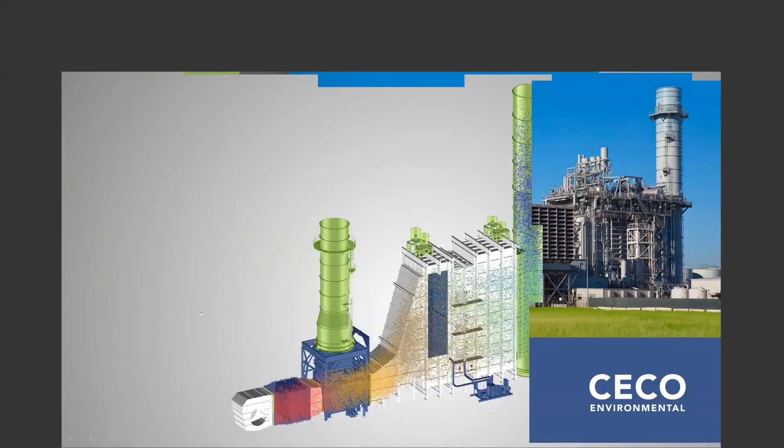As Scott mentioned, we have some advancements in the world of SCR that we are eager to present to you today. And in the next couple slides, we'll go through that, and hopefully you're able to walk away with some enlightening information. So we always like to start with a slide that shows the overall system here. So, this probably looks relatively familiar to a lot of you. Looks a little bit like your units potentially that you're operating today.

Although we're going to be going through some specific applications and features of an SCR system, it's always good to remember that even those specific parts are part of a larger system, and the goal of the larger system is to operate efficiently and safely. So although we may be talking specifically about an AIG, there are other systems upstream and downstream of that AIG that can affect the overall performance. Go to the next slide.

And to be more specific about the technologies we're going to be addressing today and how they can be applied for emissions control, we're going to be touching on what we refer to as the RASCR. That's a next generation technology that we'll go into detail about and go over some of the benefits and features of it and how it may help your plant operate more efficiently.

We're going to go into what some reagent options are to control your SCR, urea being one of those. It may not be the most popular choice at the moment, or may not be the most typical reagent in a system, but we've seen an industry trend towards urea as it does offer a safe alternative to ammonia.

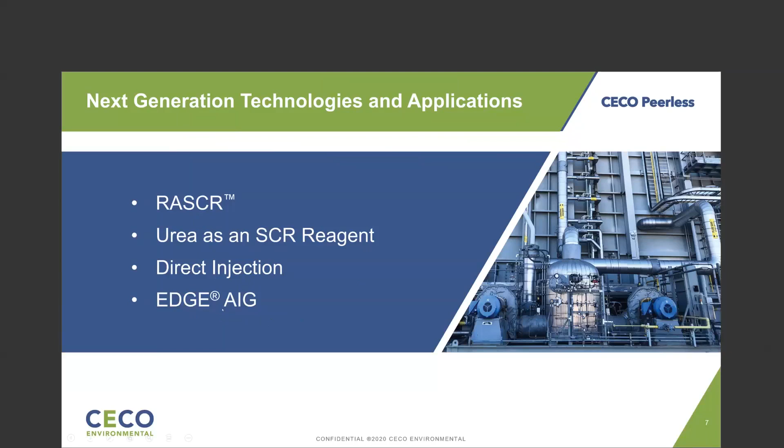Direct injection is another technology we're going to hit on. We'll go into the details of how that technology can be applied, what some of the benefits are of it, and what some feasibility aspects are that we need to take a look into before trying to apply it. And as well as the Edge AIG that we have applied on many units and seen some terrific results in terms of SCR efficiency.

Just a graphical representation of two of those technologies that we're going to go into detail about here. Again, the RASCR technology, which is on the ammonia vaporization side of the SCR, as well as the Edge AIG, that, as you can see, is the ammonia injection grid located upstream of the catalyst. We'll go into the details about both of those technologies, the benefits of them, and some analysis of how they can perform and improve your overall system.

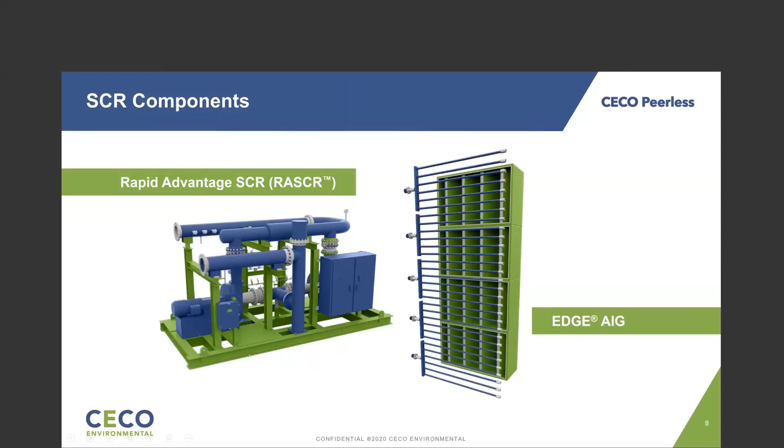So with that, we'll get right into it. We'll get into the specifics, and we'll start off with the RASCR technology, and Vaughn Watson, our subject matter expert on RASCR technology, will take it from there. Yeah, thanks, Jeff. Our RASCR technology, or Rapid Advantage SCR, is one thing that we're going to be showcasing today.

Many gas turbine plants today are operating to augment renewable power resources, such as wind or solar. These require plants to start up very quickly and achieve a peak power demand rate and vary the gas turbine load frequently to combat the variable nature of backing up a renewable resource. As we're reliant on the weather aspects of the wind blowing, the sun rising and setting with variability throughout the day, gas turbine flexibility and fast responsiveness to the changing demands is a utmost requirement.

This can take its toll, unfortunately, on the exhaust system emissions controls and may require changes to the system to achieve the compliance during these operating conditions. If you could click for me.

Many regulators are beginning to restrict the ability to operate outside of an emissions threshold during maintenance, startup, and shutdown, or MSS events. In addition, some permits are on a tons per year limit, therefore reducing the amount of NOx overall during the startup helps add additional run hours and starts to a plant's capabilities. It's about reducing the area under the curve. Could you click again for me?

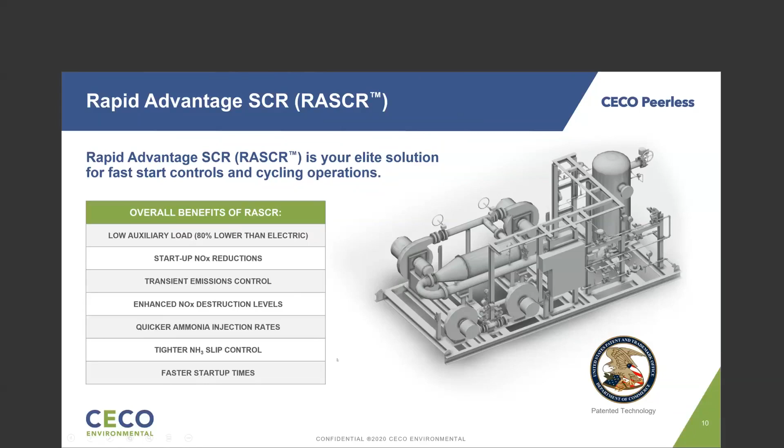Thank you. The challenge becomes a bit twofold. It's a race between the exhaust temperature versus time curve and the catalyst reactivity versus temperature curve. The exhaust temperature is ramping up while the catalyst efficiency is increasing. At the same time, the ammonia must have adequate temperature to be vaporized. We wish to begin ammonia injection sooner in the process so that we can begin reducing NOx in as short an amount of time after startup as possible.

The ammonia injection rates during the startup period are nearly double or higher than steady state operation. So not only do we need the heat input immediately to vaporize, we sometimes need twice as much heat during the startup period to vaporize the larger quantity of ammonia during the startup cycle.

The key there is to be able to vaporize the large quantity of ammonia rapidly and accurately deliver it to the catalyst as the catalyst is moving up in its efficiency curve without exceeding ammonia slip limits. Using our RASCR technologies, we can very, very quickly vaporize the ammonia and begin ammonia injection as little as minutes after startup. You could click for me.

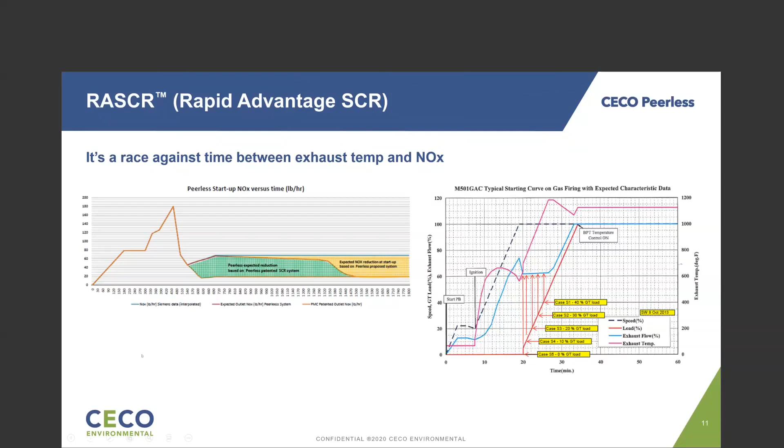On systems that rely on electric heaters, the additional electric kilowatts required to quickly vaporize the quantity of ammonia needed at startup becomes extremely large and begins to be cost prohibitive very rapidly. On the other hand, systems that rely on hot gas recirculation fans, the challenge is the gas drawn off of the HRSG is not at enough temperature during a startup to adequately vaporize the ammonia.

We have successfully hybrided electric and hot exhaust systems together. However, the RASCR system that we've developed recently has become the number one choice for these fast start systems. Peerless has this proprietary equipment designed to achieve emissions compliance during these startup and transient conditions. This equipment is a suite of solutions aimed at fast start and transient load operations on combined cycle gas turbine plants. And again, it allows us to rapidly vaporize ammonia while controlling NOx and slip during shifts in load.

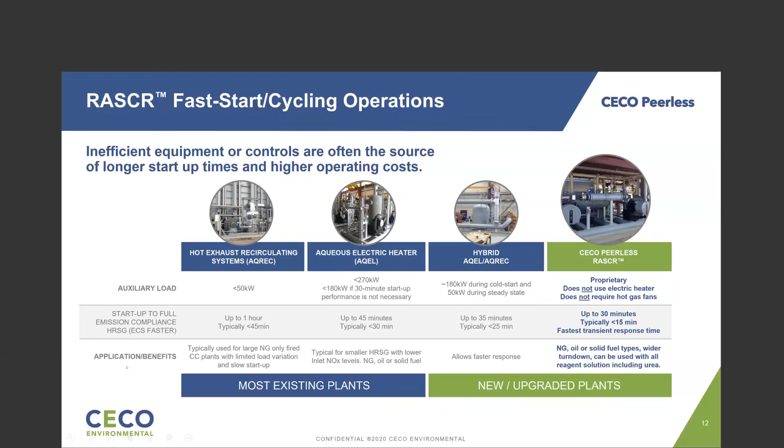In addition to the startup and transient operational advantages, a major advantage to this technology is it is extremely economical to operate. When compared to the large parasitic load of electric vaporization or some of the higher maintenance costs of a hot gas recirculation system, the RASCR technologies offer a substantial operating expense savings, in many cases offering a return of investment of as little as a year or more.

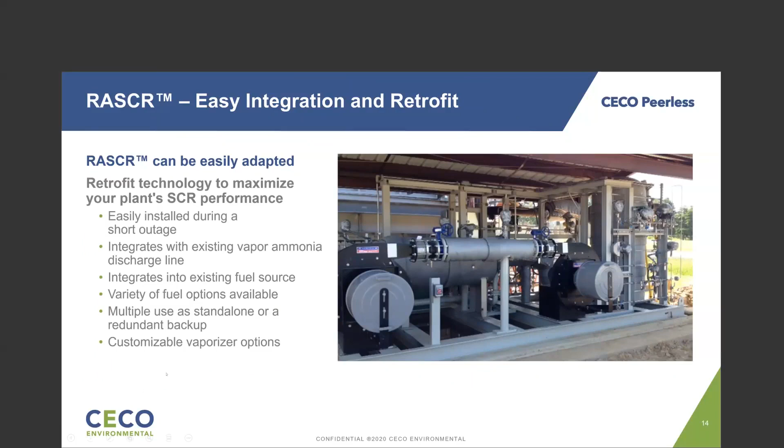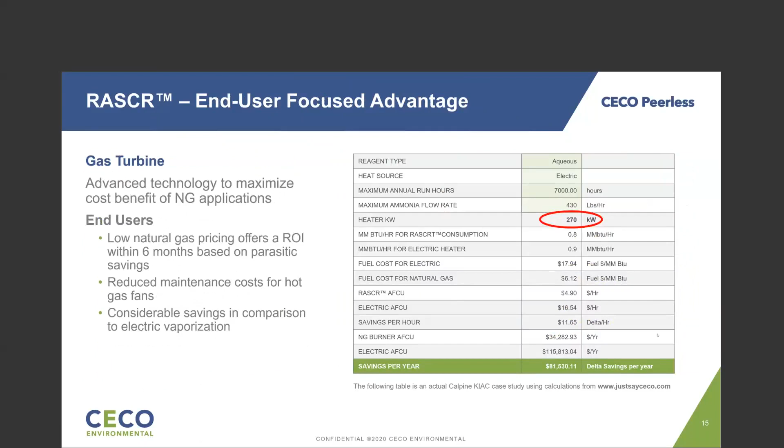And with that, I'm going to hand it back over to Jeff to talk about our next topic. Thanks, Vaughn. Yeah, Scott, if we could go into the next slide, that was a good overview on RASCR technologies. If anyone has any questions on that, feel free to put it in the chat and we can address those at the end of the presentation.

So it was a good segue discussing some options on how you can vaporize ammonia and introduce it into your SCR system. What we want to focus on now is some of the different options we have as a reagent. We will get into the specifics of urea, but let's first cover some of the more traditional options we have.

So in an SCR system, really the function of the storage and handling system is to store the reagent that we're going to use to generate ammonia gas in front of the catalyst. So there's some very straightforward ways to doing that, and some that require a little bit more equipment, engineering design. A lot of the decision-making factors in which reagent to use are based on the cost benefit versus the risk. And that risk typically comes in the form of safety and the safety requirements required to store ammonia at your site.

A very common reagent to use on an SCR system is anhydrous ammonia, especially larger units. The advantage here of anhydrous ammonia is you don't have the liquid mixed into it. It's straightforward. You pull off the tank as a gas, you introduce that into a dilution air system, and you deliver that to the AIG in front of the SCR catalyst. It's a very straightforward way of effectively reducing NOx.

Usually that is stored as nearly 100% ammonia gas in a pressurized steel vessel. So the tanks are often large steel pressure vessels kept under pressure, and you pull off the gas from that tank and introduce it to your system. Obviously ammonia has safety concerns with it, especially when it's pure ammonia gas. If there were to be a leak in that tank or in the piping or in the delivery system, it could be a major health hazard to the personnel of the plant. It only takes a few hundred ppm of that raw ammonia to be fatal to the people exposed to it.

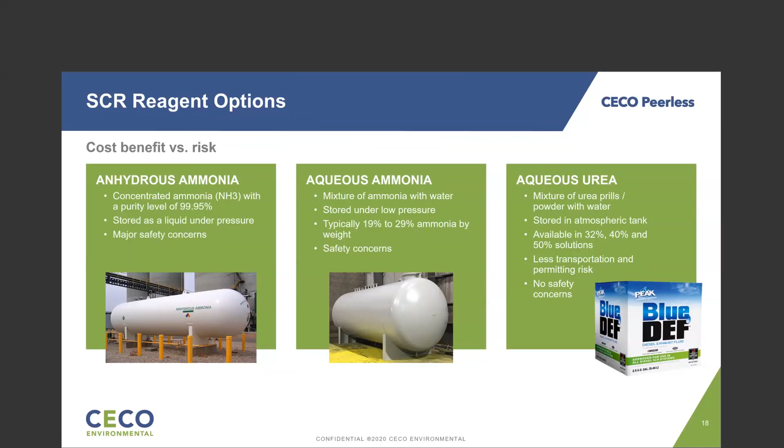It comes in different solutions. 32%, as I said, is the diesel emissions fluid, DEF, concentration, but it also comes in 40% and 50%, regularly available in many regions. That allows you to sometimes store less water, obviously, and more solution. Clearly, because it's a non-hazardous liquid, there's less transportation and permitting risks and very little safety concerns for the plant personnel.

Getting into a little bit more detail on the urea, now that we've talked about the differences between them. There are some challenges with urea. It's not the same as an aqueous ammonia system. There are different challenges and considerations that need to be taken into consideration during the design of a system using urea. Urea is very corrosive as a liquid. For that reason, it's not going to be stored in a carbon steel tank. It'll eat right through it.

So the storage tanks are typically either stainless steel, which can be expensive, or there are less costly options, usually FRP, or fiberglass reinforced plastic. Those tanks come in a variety of sizes. They even come in double wall tanks, and we'll get into that a little bit. All the piping, anything in the wetted parts, needs to be stainless steel, and you need to take a close look at the seals. Viton is a good seal for this type of solution.

Another challenge with urea is the temperature limitations. Depending on the concentration, it has different freezing temperatures, but you do want to avoid having the urea salt out or crystallize in your system. It could cause some major headaches in the fluid delivery system. So a lot of plants we'll see need to heat trace and insulate their lines in order to use a urea-based system. Obviously, you're going to take into consideration how much capacity.

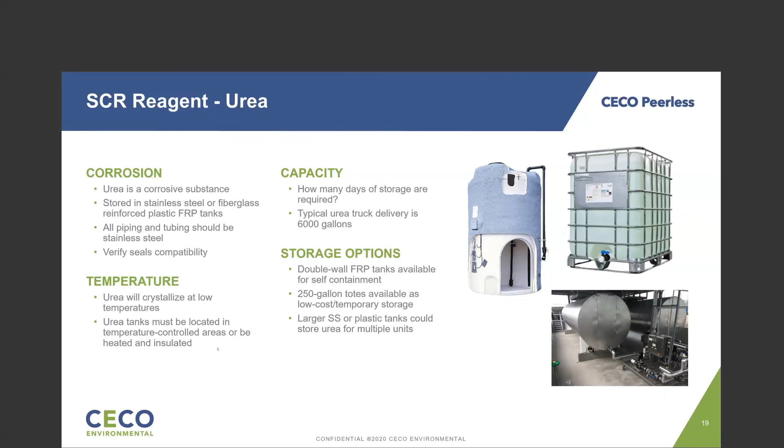So something we've seen in the industry is reagent conversions of existing systems. There are existing anhydrous ammonia systems that, due to safety concerns or more availability of aqueous ammonia, are switching to aqueous ammonia or potentially even aqueous urea, or aqueous ammonia systems converting over to aqueous urea systems. It may not be as expensive as you might think. Depending on what system you're going from and to, some parts may be able to be reused.

For instance, an anhydrous ammonia tank may be able to be repurposed as an aqueous ammonia tank. Obviously, with an anhydrous ammonia system, you're not going to have the vaporizer, so the addition of a vaporizer would be needed. The addition of the fluid handling system would be needed. So if that's a consideration in any of your facilities, those are things to take into account: space availability and power consumption of these new pieces of equipment.

If you're going over to a urea system from an aqueous ammonia system, it's unlikely that the tank is going to be compatible unless you have a stainless steel tank there already. So a new tank may be needed. It's possible a fluid handling system could be needed. The difference between the amount of ammonia injected and amount of urea injected typically isn't so great that it's out of the range of the fluid handling system, but you obviously need to take a close look at that.

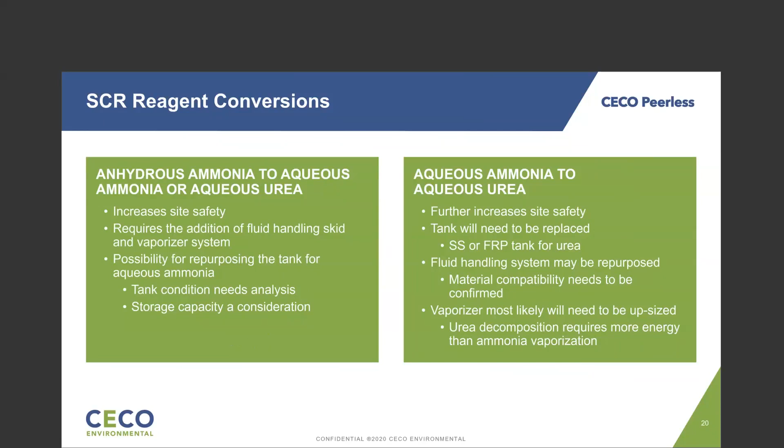So our first poll question of the day. What type of reagent are you using at your facility today? If you have an SCR system that you're operating, if you could tell us what type of reagent you're using: anhydrous ammonia, aqueous ammonia, aqueous urea. Lots of votes for aqueous ammonia. To be expected, I think.

All right, thank you for the feedback on the poll. Appreciate that. So another technology we want to get into that, for combined cycle units, certainly wouldn't be the typical solution. Typically what you're seeing, like we've been talking about, is an aqueous ammonia system with a vaporizer, whether that's hot gas fans or electric heaters, producing the hot gas needed to vaporize that ammonia and sending it through some interconnecting piping to the ammonia injection grid, introducing that ammonia gas in front of the catalyst. A very efficient, typical way of reducing NOx in a combined cycle plant.

We can advance one slide. There are other options for that, though. Something we refer to as direct injection. So direct injection SCR is a method of supplying ammonia vapor, ammonia gas, to the SCR system gas path without the need for a vaporizer or the AIG. So what it's doing is it's using the heat energy from the main exhaust gas to vaporize the liquid, whether that's ammonia or urea, and turn it into an ammonia gas upstream of the catalyst.

Now, on these types of units, there are many feasibility considerations that need to be taken into place before deciding whether this is a good option for your unit. One thing: is there a duct burner in the gas path? If you're injecting an ammonia solution and it passes over the heat of a duct burner, much of that ammonia is going to go to NOx. It's going to burn up the ammonia, it's going to go to NOx, and you actually end up increasing your NOx potentially. So if there is a duct burner in the gas path and the only way to inject is upstream of that and the catalyst is downstream of that, there would certainly be some challenges with implementing a direct injection system.

Again, the typical SCR system with the vaporizer leading to an AIG, the major advantage of the AIG is you can get very good distribution of ammonia across the catalyst face. That's the greatest challenge in direct injection. Oftentimes able to be overcome, not every time. So what is the cross section of the duct in which you may be injecting that liquid ammonia or liquid urea? Is it feasible to get enough coverage of that ammonia to then mix out with the exhaust gas prior to the catalyst? How much residence time is there between the point of injection and the face of the catalyst? If it's a small duct at very high velocity, there may not be enough time for the reaction to happen or to evenly distribute.

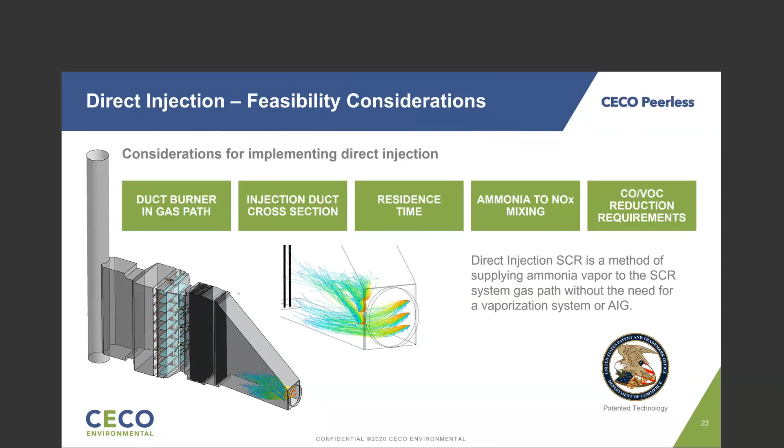So if we're injecting the liquid directly into the gas path, we're bypassing the need for some separate equipment, right? We don't need that separate skid that has the dilution air blowers and heaters or the hot gas fans. We have less equipment there. So there's obviously a cost savings with the types of systems that can be direct injection method.

The AIG doesn't need to be there. So a lot of the valving, the AIG piping, and the grid itself does not need to be there. So there's clearly some reduced capital costs there. Without the need to operate those blowers and heaters, without them even needing to be on site, obviously there's some operational savings there. You don't have the hundreds of kilowatts needed to vaporize the liquid into a gas.

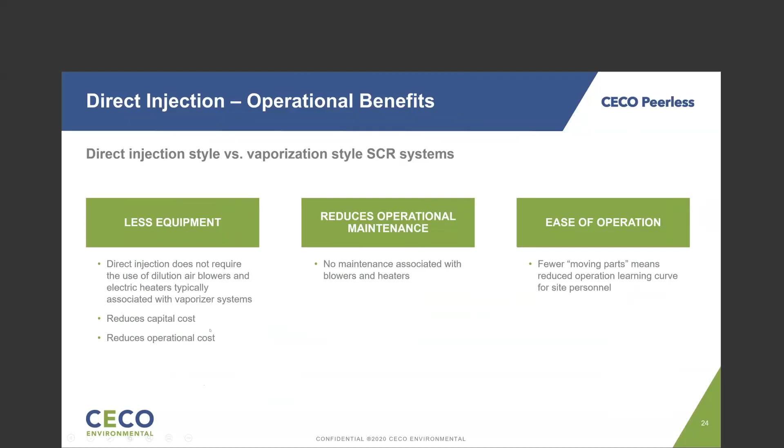You're using that heat energy just from the exhaust gas, the main exhaust gas, as your medium to vaporize the solution. And again, ease of operation, fewer moving parts, easier it is for the plant personnel to operate. There are other challenges that could be a little less familiar. So graphically, here's how a system could look.

So those injectors obviously need to be design engineered for whatever the application is in terms of flow rates, temperatures, pressures, and all that. Definitely need to take in consideration where those injectors are located, how they interface with your piping. Obviously, as we mentioned, let's say if this was a urea direct injection system, you don't want that liquid urea coming in contact with that carbon steel duct. So you're going to want to make sure the system is designed as such to not cause any other damage.

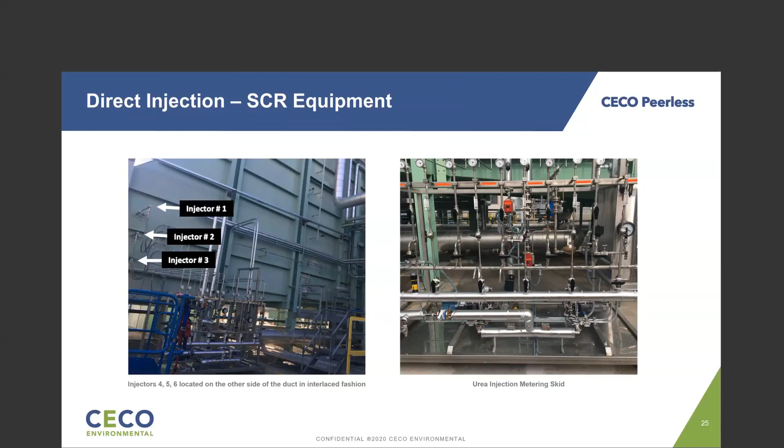There was a lot of headaches that this particular facility had with their system in terms of maintaining it, doing a lot of replacement parts, a lot of damper changeouts, a lot of catalyst cleanings, things of that nature. So they were very motivated to retrofit a more user-friendly system onto their units. So the solution that we implemented was actually a urea-based system, direct injection system.

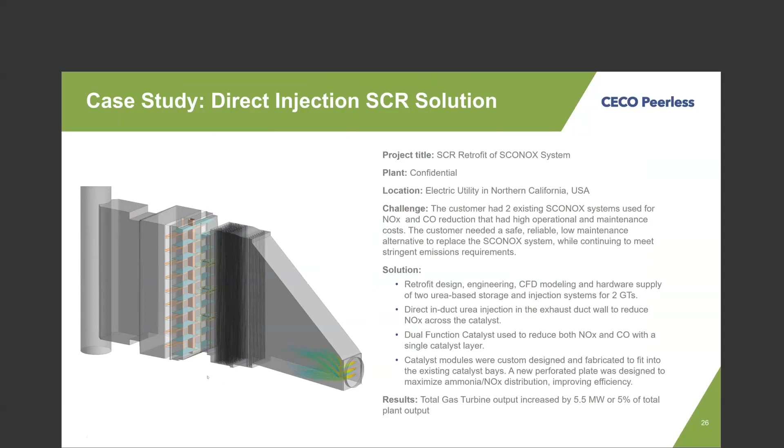In this particular case, the pressure drops were dropped greatly across the unit. The ancillary equipment associated with the old system was removed, and we were able to increase their power output by quite a bit, giving them a pretty good ROI on this system. A little bit more data on the next slide. Just showing some of the numbers there, 50 to 100% load range data. You can see some of the very low NOx numbers under 2 ppm, 94% reduction in one case there. And again, the very low CO numbers, and even the ammonia slip numbers were quite low.

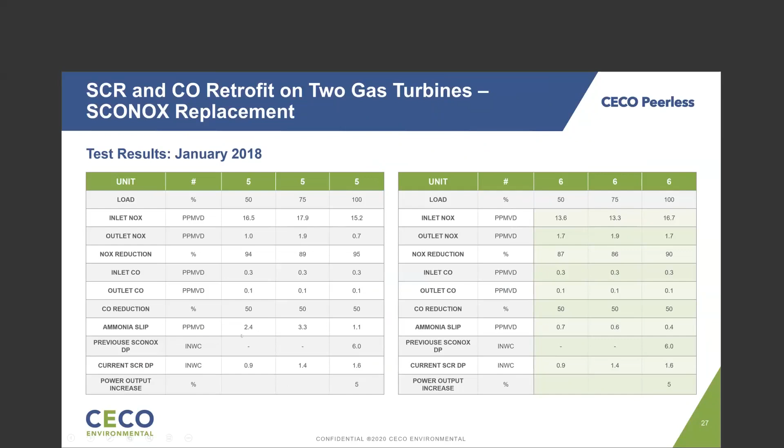So, a very, very highly efficient emissions control system here as a retrofit direct injection application. So that's just an example of how it can be done, and a little bit of data, a little bit of graphic there on how that's carved out in a retrofit application.

Looks like the large majority have a duct burner upstream of their SCR. Yep. All right. Not too surprising there. So those could be a challenge for this type of technology.

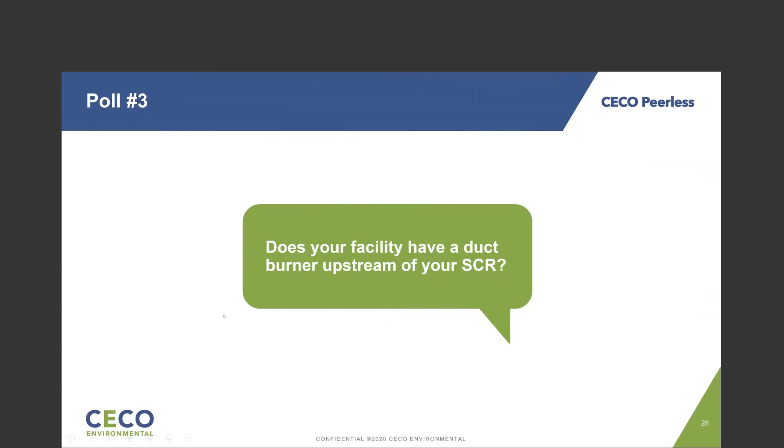With that, Vaughn's going to go into the details of the Edge AIG system as our final piece of advanced technology. Yeah, thanks, Jeff. As Jeff kind of alluded to earlier, one of the things that's most critical to these high-performance SCR systems is the ammonia to NOx distribution. And one of the biggest improvements to an existing SCR system would be improving that ammonia to NOx distribution by improving the ammonia injection grid design.

So the ammonia to NOx distribution plays such a critical role in the overall SCR performance. When we talk about meeting permit level emissions, if your AIG is, say, plugged or has degraded, or you are facing design challenges in achieving current day emissions concerns, one of the things that we would look at is the ammonia to NOx distribution.

When we are looking at a new SCR catalyst, a couple of the key factors there are what's the velocity distribution, what is the temperature distribution, but the most important one that we've seen is the ammonia to NOx distribution. And by improving that or getting it closer to sub 10% RMS, we've seen a major increase in the overall SCR performance.

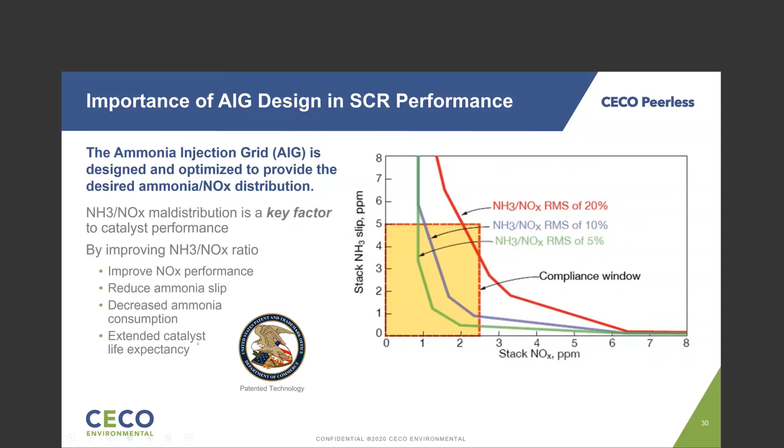By improving this ratio, we're improving the NOx performance, reducing the ammonia slip that plants are seeing. We are decreasing the ammonia consumption that plants are using, and in many cases, extending the catalyst effective life by utilizing some of the margin that they have left in their existing catalyst. If you could go to the next slide for me.

So Peerless's patented Edge AIG design, which has been Peerless's standard since about 2007, has kind of changed what common ammonia to NOx ratios we see out there in the SCR market. A lot of times back in the early 2000s, 15% RMS ammonia to NOx was very common. However, with latest gas turbine technology and latest air permit requirements, that's simply not good enough to achieve, say, 2 parts per million NOx, 2 to 5 parts per million slip, greater than 95% DeNOx efficiency.

So by improving that ammonia to NOx distribution number, we've seen a number of plants be able to achieve modern day technology on catalyst that's 10 to 12 years old without having to replace that. One of the things that's also a great side effect, so to speak, is that the cross-sectional area of our new AIG lances is inherently less susceptible to plugging. So that in turn means less maintenance costs and less outage work that needs to be done to clear plugged AIG holes. So this gives us a distinct advantage.

Again, it's been our standard issue technology for over about 10 years now, and we've been retrofitting a lot of plants with this design to allow them to achieve current operating conditions.

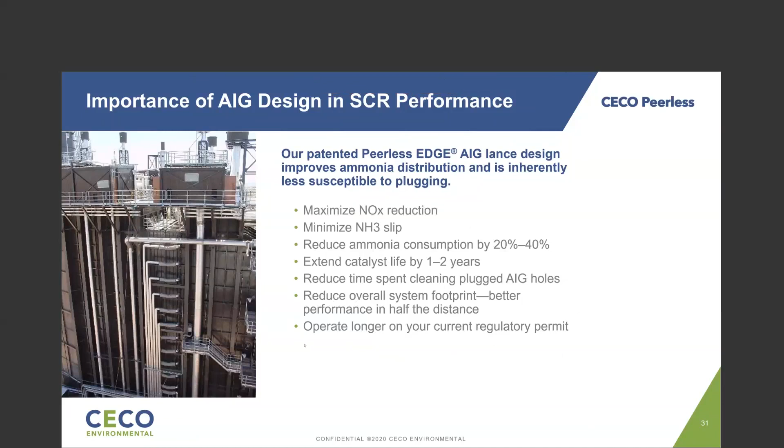How this works is on conventional AIG designs that were probably prevalent in the late 90s, early 2000s, which was a circular lance with holes at 12 and 6 o'clock. Those designs relied on low velocity wisps of ammonia that required quite a bit of residence time and mixing distance to achieve the distribution that it was able to prior to the face of the catalyst.

In today's Peerless Edge AIG design, we're allowing turbulent mixing to take place over the cross section of our lance by the wake that is forming on the backside of our lance, as well as, instead of low velocity wisps of ammonia being injected, we are now dealing with jet penetration. So we are increasing the pressure within the lance.

We are effectively getting further into the exhaust stream with that mixing and putting our ammonia plumes right in the line of our wake that's created with our AIG design. And that has seen major improvements in ammonia to NOx efficiency, as well as the distribution across the entire cross section of the duct.

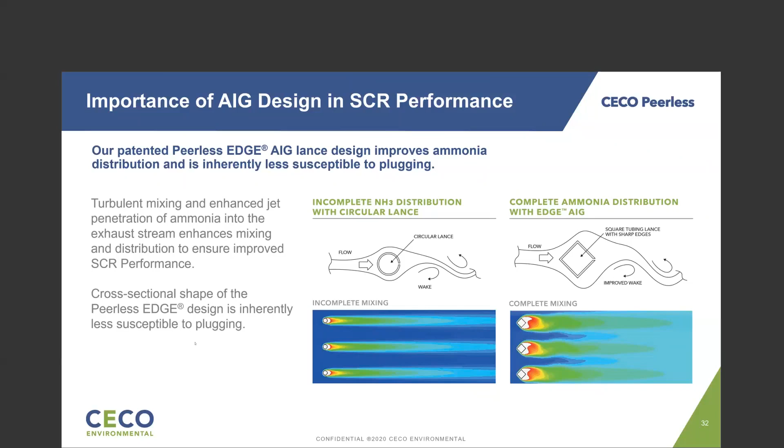So this design not only has been proven, but it's also become a really big game changer for us on a retrofit basis to allow older plants to meet newer technological requirements.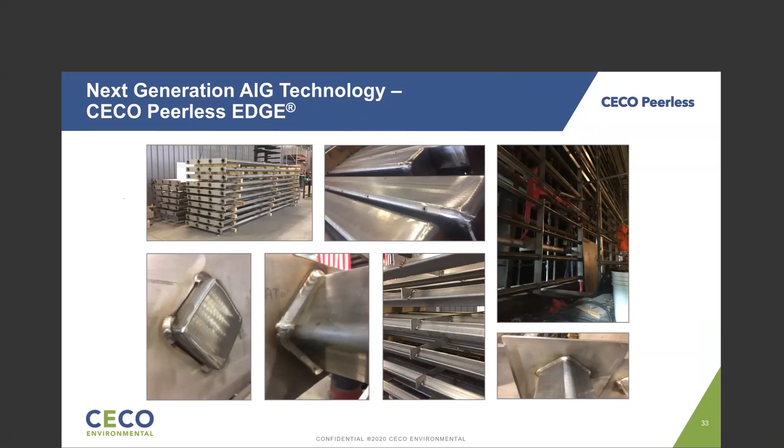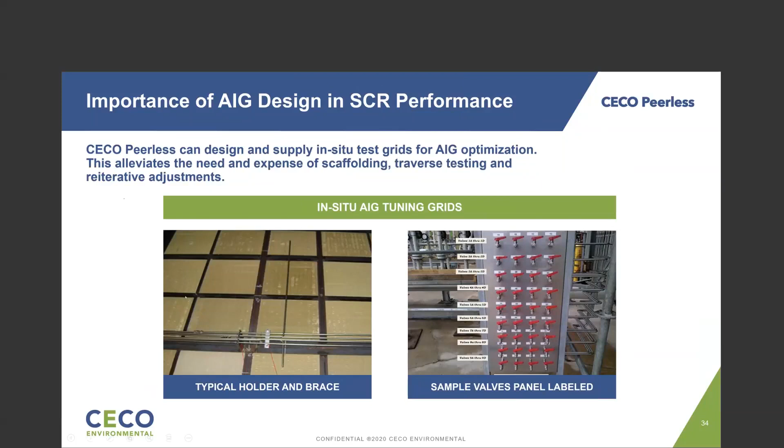One of the ways we can verify our claims is by going in and tuning ammonia injection grids, but also going in and sampling the exhaust gas to measure the ammonia to NOx upstream and downstream of the catalyst in order to show that by improving the ammonia to NOx RMS values we're able to improve the SCR performance as a whole. In addition, we're able to take our better technology and tune it to meet the utmost performance it's capable of right after installation and during a quick outage.

A big issue we experience in the field is AIG plugging. Usually it's ammonia byproducts that are carried over or actual degradation of the metal, like rust, being impinged on the orifices of the AIG. Mill scale and rust can break free over time. Some of these plants are 20 years old, and rust deposits are steadily making their way into the holes of the ammonia injection grid.

With the Edge AIG design, the rust and any other debris that's in there has a spot to accumulate without plugging up the holes. One of the big issues with plugging is that as soon as it plugs, you can't predict the ammonia to NOx shift in distribution. The ammonia to NOx ratio shifts as the AIG gets plugged or fouled. Having a design that not only improves the ammonia to NOx ratio but also inherently combats that makes for a really great product.

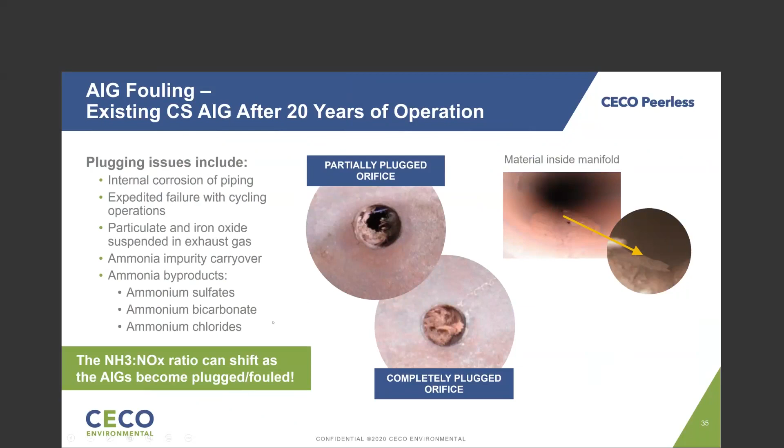A quick case study. This is a plant in the southeast United States. They had 9 HRSGs. We had worked with them because they had noticed some AIG fractures and some other issues. Peerless had gone in and done 1 unit of Edge AIG upgrade. At the conclusion of that, they went ahead and did the other 8. We had seen their ammonia consumption go from about 600 to 700 pounds an hour down to about 300 or 400 pounds an hour, depending on load. And the plant was extremely pleased.

After doing some tuning and some catalyst sampling, they were able to estimate an extension in catalyst usable life of about 2 years. So not only did this reduce their chemical usage, improve their NOx control, and improve their ammonia slip, but they were also able to stave off a capital catalyst expenditure for up to 2 years before putting that back in their maintenance budget. So this was a huge win for Peerless and for the end user. And that was 9 units of Edge retrofit that we've done.

I did mention earlier that this has been our standard design since about 2007. In Peerless's history since 1988 of doing SCR systems, we've done 1,032 SCR systems worldwide, of which about 42% are of the Edge AIG design since about 2007, as well as the retrofit units we've done. So this is a proven technology. It's an easy retrofit that can be done in a short outage, and a lot of things we do don't disturb adjacent equipment, such as external manifold piping and so forth.

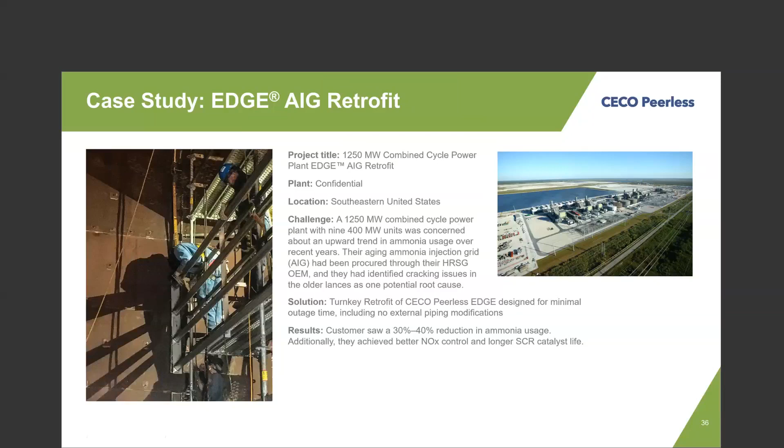So to recap real quick before the Q&A section, the next generation emissions technologies can increase plant efficiency and performance. We've seen the reduction of parasitic load for ammonia vaporization by 80% or more using the RACER technology, and reduced ammonia consumption by up to 40% using our Edge AIG design. A combination of these technologies, whether it be direct injection or RACER, has seen DeNOx of greater than 96%, CO destruction greater than 98%, and VOC destruction between 40 and 50%. And this is what the industry is trending towards for emissions from 2020 and beyond.

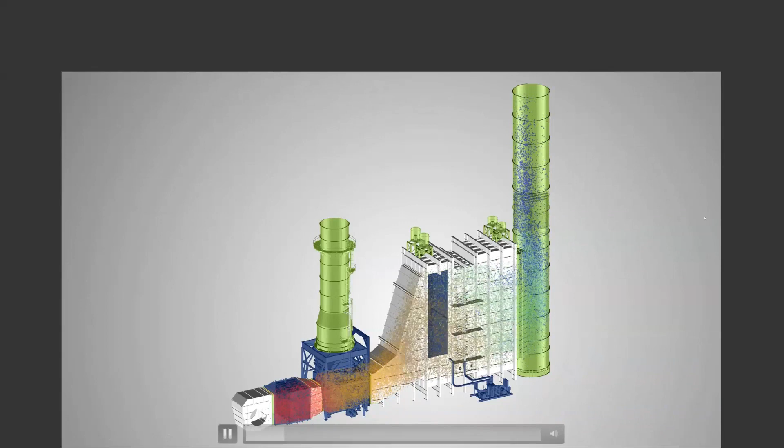Okay, how difficult is it to retrofit a current AIG to add the Edge system? We are doing several in this upcoming fall outage, most of which are an 8-day outage. In many cases, we are simply scaffolding downstream of the AIG. We are cutting off the existing round AIGs in many cases at the wall, and then fitting our edge lances to the stubs that stick through the wall. There are a few distinct cases where that's not feasible, but most oftentimes we see 8 to 10 day outages, and we can do 2 units simultaneously with the manpower we have available.

Okay, we've got some questions in here for Jeff regarding direct injection. How do you tune direct injection systems? Yeah, so in one of those photos that was shown of the metering skid, there is the ability to bias or balance the ammonia or urea going to the injector. So there's the opportunity to change the pressures and flow rates of both the air and the liquid to the injectors. And there's also an opportunity to increase or decrease the penetration into the duct wall of the injectors. So that's something that's preliminarily done with CFD modeling and then done in the field as a tuning process during the startup of the unit. So there is some tunability to the direct injection units.

Can direct injection be used as a backup system for the AIG, like if your principal skid fails? I'd say yes. That's a good question. That's a unique approach to adding some redundancy. So if your vaporizer was to go down, you could redirect the fluid to the direct injection injectors upstream in that inlet duct and get NOx reduction that way. You know, this is all assuming that the feasibility aspects of the direct injection system have gone through, such as not going through the duct burner. But yes, that is feasible. And that is something we've actually done on some units, not in the HRSG world, but in other types of combustion sources.